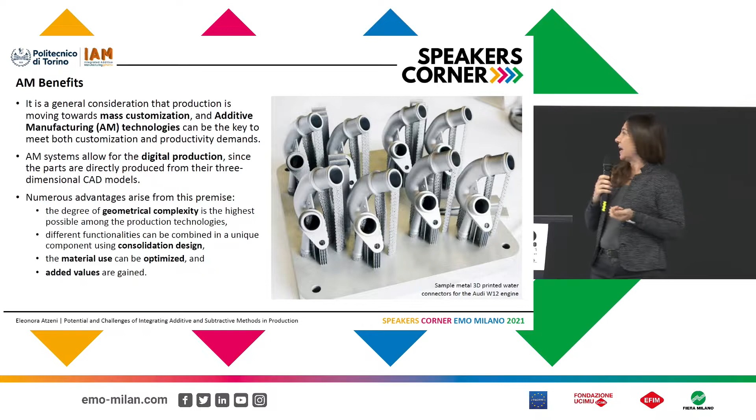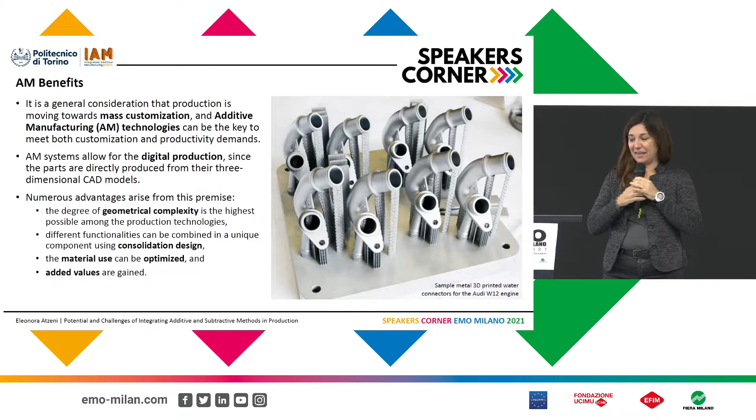Additive manufacturing, as was introduced before, is a flexible technology, is a digital technology. So what you create as a three-dimensional model is produced by the machine. So we have the physical replica of your idea. And this is disruptive, and this meets the mass customization requirements, because you can change the model, you can change the part, you can build different parts on the same job. We can have a customization of components. We can have components with multiple functionalities in the same part, avoiding assembly of different parts. So this is the consolidation, the reduction of number of parts. And we have the added value. This is the most important characteristic of additive manufacturing components.

But there are also some drawbacks. And today we discuss basically the surface quality, because when we want to combine subtractive, it's to remove material to obtain specific properties on the surface.

The part is typically rough. The roughness is higher than conventional machining, especially when we compare it with casting. And the tolerances are larger than other subtractive methods.

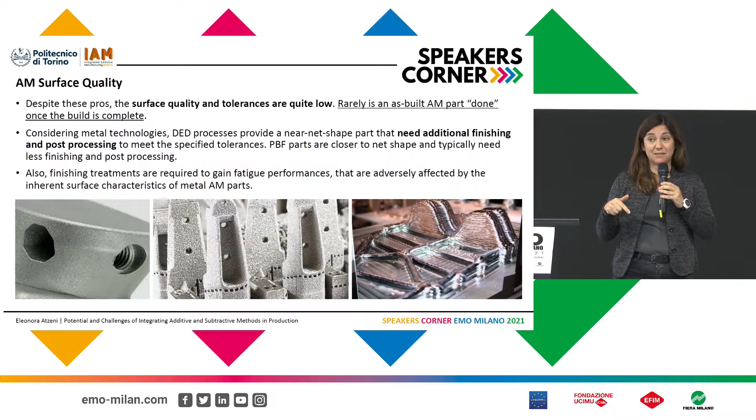So what type of finishing technologies? Basically, the same techniques used in conventional parts can be used in additive manufacturing. Considering metal parts, we can apply media blasting and shot peening to improve the quality of the surface and also obtain a compression state on the surface. That's another characteristic.

Sandblasting basically depends on the system, but it's usually performed manually by the operator. So we have a loss of uniformity on the surface treatment, and it takes a long time.

There are also mass finishing systems, mechanical, using abrasives in a tank, so the part is surrounded by these abrasives. This is faster, but again we have some problems accessing, especially internal surfaces and internal features.

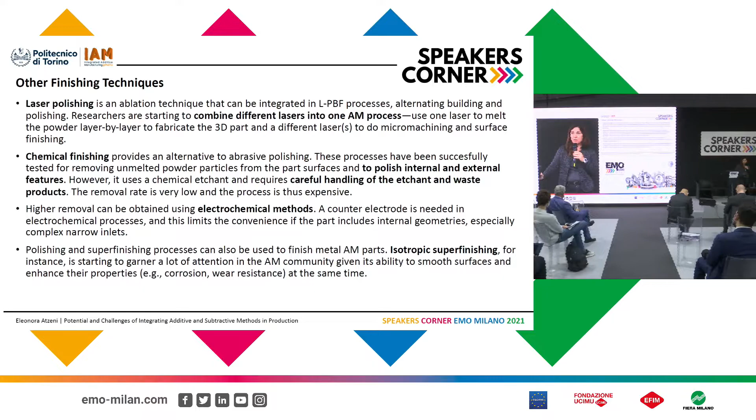Other methods include laser polishing, and this is interesting for laser machines. We have a laser in the machine, and we can combine different lasers, performing building and polishing in the same machine. Some researchers are working on this topic.

Chemical finishing uses an etchant, so we have problems related to safety hazards and the sustainability of the process. Electrochemical finishing, again for internal features, uses an electrode, so there are accessibility problems. Isotropic super finishing for mass production is another interesting system.

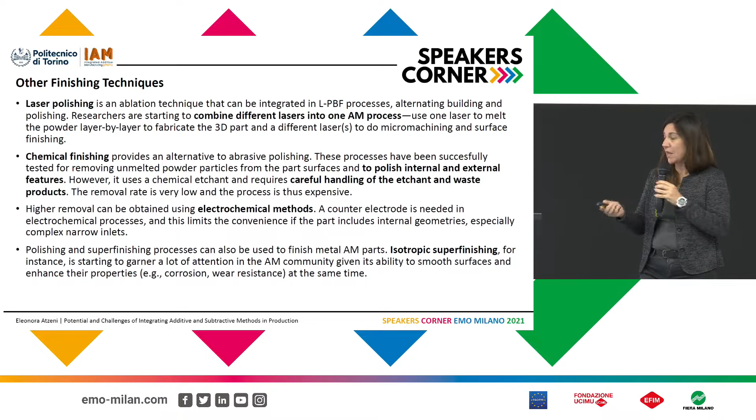By these technologies, we can improve the aesthetic appearance and gain tribological functionality, but if we want precision, to meet close tolerances and the requirements of the design, we need subtractive methods, traditional subtractive machining. In case of machining, we have different solutions. In general, when we talk about hybrid machining, it's the combination of additive and subtractive to obtain this strict part quality.

A possibility is to perform the operations in sequence. First we have production by additive manufacturing, then we move to another machine, a CNC machine, and perform the machining operations. It's better if it's a 5-axis machine, due to the complexity of the geometries.

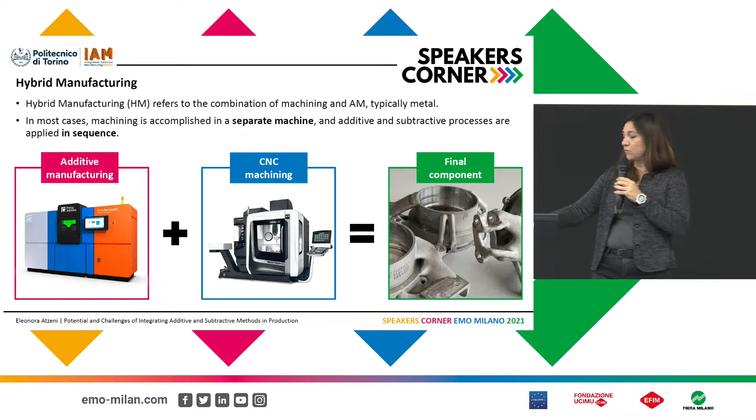But in this case, the same characteristics of additive manufacturing that make this process attractive, the complexity of the part, the optimization, etc., become a problem when machining, because we have to hold and fix the part in the machine, so we need reference surfaces and datum points. The problem is similar to what happens in casting: low stiffness, since we reduce the weight, and the part is optimized for specific loads that are different from the loads applied by machining. Probably we also have difficulty reaching the surface with the tools.

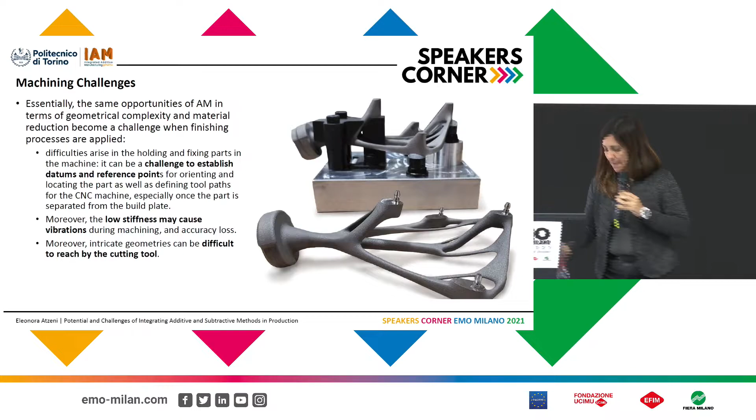So we also have the possibility to alternate. This is a solution: first, the simple geometry is produced by machining, which is cost effective, then we add the additive part.

So we can alternate, but most challenging is the combination of the two processes, additive and machining, in the same system.

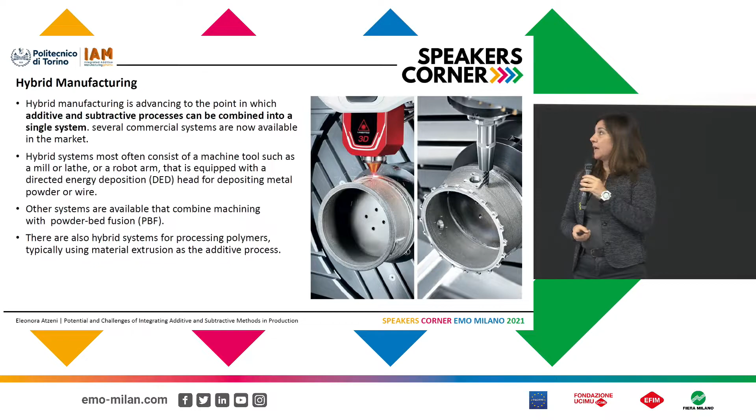There are several commercial systems available, especially based on directed energy deposition. There are some solutions also for powder bed fusion, but it's quite more complex.

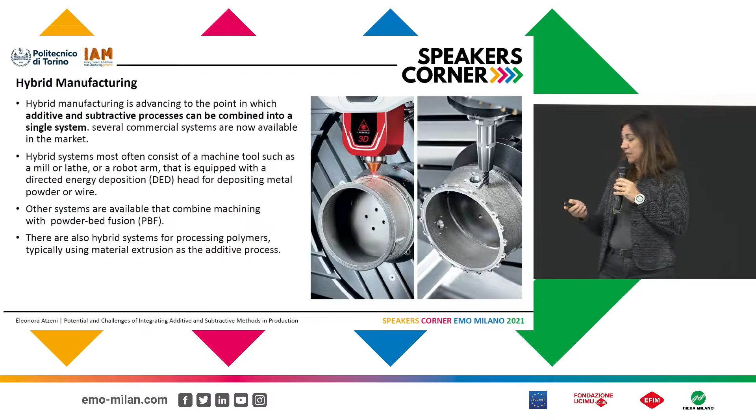With that, we can add features to a substrate, an existing part, and without repositioning, we can machine the same part and perform the surface finish.

In this case, we can combine the advantages, because by additive manufacturing we can add to a substrate, we can repair a component. The repairing application is one of the most interesting applications. We can also change the material, applying multi-graded material possibilities to improve the strength on the surface, or for thermal applications, apply material with higher conductivity only where needed.

So reducing expenses, but also difficult to work with costly materials. By machining in the same system, we avoid repositioning, and we increase the precision of the operations because there are no errors due to changing machines, transferring to another machine, or repositioning the part, so alignment errors.

So internal features are created, machined, and then we add other material. This way we can access internal features that at the end of the process would be inaccessible. So these are all benefits, but there are also many challenges about these processes.

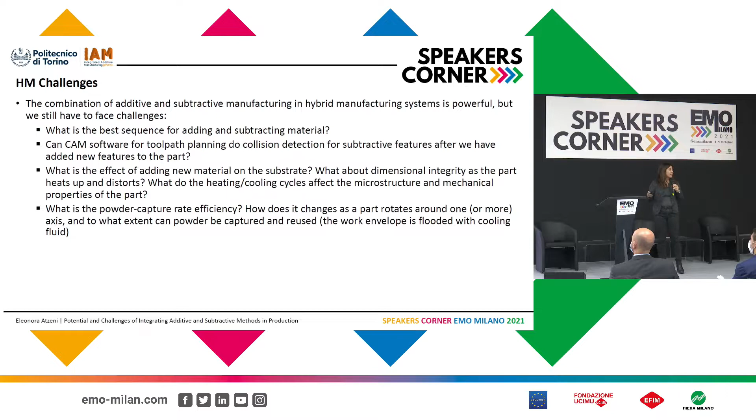What is the best sequence for additive and subtractive? We have to decide. How do we define the toolpath using computer-aided manufacturing software, because when we add material we could have a collision, so the software has to consider this aspect too.

And what is the effect on the substrate? Because there are thermal effects. We add material, we have heating, and it's possible to have deformation or changes in the microstructure. So this aspect should also be considered.

And in the case of deposition or machining, if you use lubricants in machining, we have the problem of reusing the powder. So what is the powder capture rate? This aspect should also be considered.

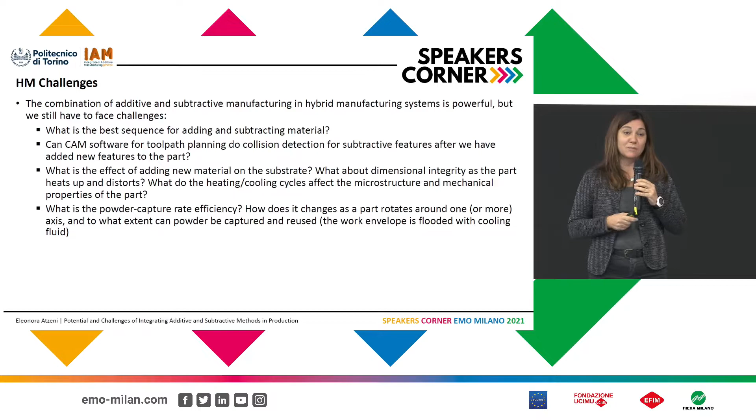So these are challenges that have to be faced in future research to make the process more efficient for industrial production. So I'll conclude with this sentence: very interesting promise, but we have just barely begun to exploit its capabilities. Thank you for your attention.

Thank you very much, and that was perfectly timed, by the way, so thank you for that too.

So we looked at the benefits of additive manufacturing, the benefits of education, and now we need to look at the benefits of developing the technologies and processes in the machines. I would like to introduce Florian Voigt, AM Process Chain, Head of Sales and Application for LASERTEC SLM Technology at DMG Mori. He will discuss challenges in connected processes and unsolved problems in this field.

What I wanted to say is that I think it's very interesting that Mr. Voigt has expertise specifically in SLM, mainly in the SLM processes. And as we saw, hybrid technology started with DED, but now we're seeing how powder bed fusion SLM type processes can also benefit from hybridization.

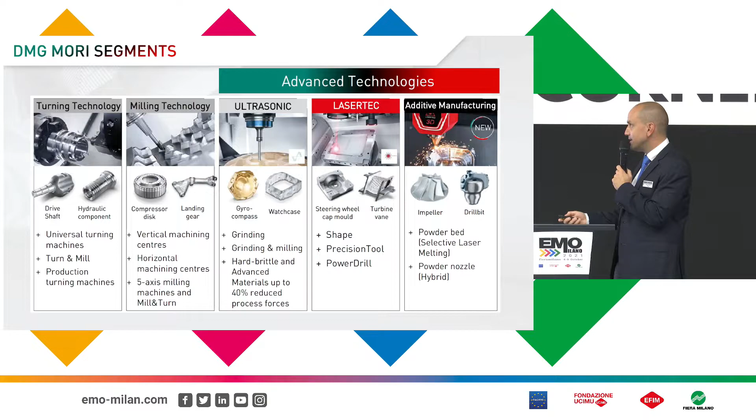I don't think I have to talk too much about DMG Mori, you're all well aware we're number one in the world when it comes to machine tools, with different locations all over the place. In addition, we have not only machine tools, advanced technologies is one of the nice parts of DMG Mori, because we benefit from all the know-how within the group when it comes to CNC machining. You nicely explained the problems with clamping and the forces during the CNC process, and this is an extreme benefit and one of our core businesses.

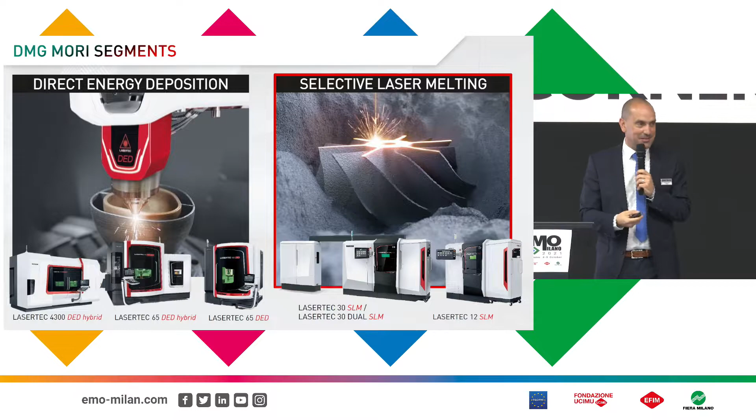Some of these pictures you have already seen, so again not well aligned, but in the end we talk about the same topic, so you will see some pictures in some of our speeches. These are the parts you well know: nice, shiny, fancy, with a lot of beneficial features integrated, and this is what you expect.

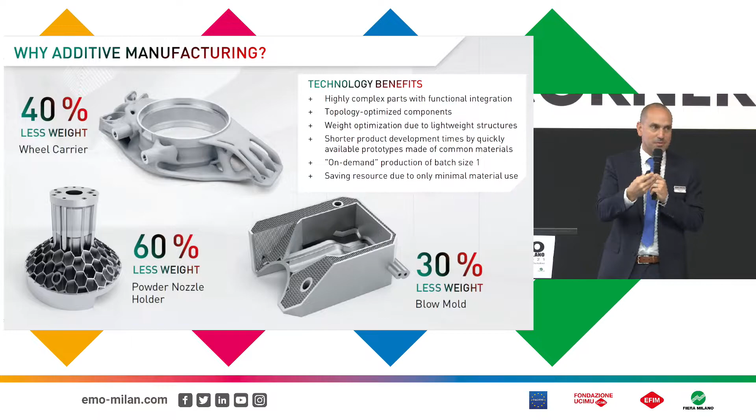To a certain extent, it's also our fault that we always show these nice, shiny, sometimes finished machine parts at exhibitions. This is the expectation of most of our customers, so when I talk to prospects and customers, they have this in mind.

I want to give you a small insight, just a small story. Our management changed, and we now have a new managing director with a strong background in CNC machining. We got a requirement from a potential customer to print a nice wheel carrier, as you can see over there, and the question was: can we build this part within the specs?

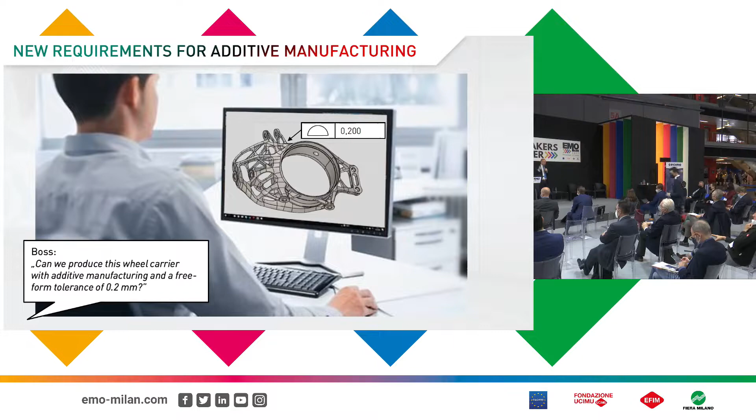You might see this small sign up there. We all stood up there, all the speakers, and I asked who is aware of what this sign means. I want to place the same question here: do you know what the sign means? Has someone an idea? For sure, a metrology expert from Renishaw could answer the question, but we had to look it up. It's free-form tolerance, meaning the entire part, including the not-machined areas, must be within this tolerance.

The question was quite easy—you can expect the same from your boss: can we produce this part within the specs? Our application engineer, a really educated guy with a lot of experience, was unable to answer this question up front. No chance to answer it. This was quite funny—it took us over two months in the end to answer this question.

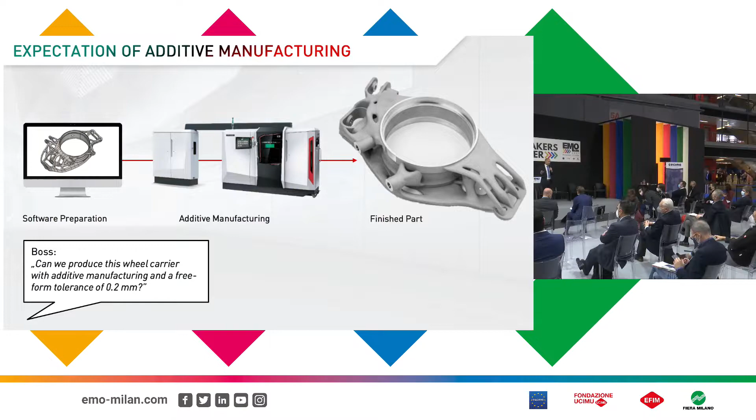I just want to give you a small insight about this internal discussion. Most people think, as I said, you just print it and get your part right away—no headaches, no problems, nothing post-processing wise. But that's, sorry to say, not true. You have to think about how you get to your finished part.

Again, people tell me all the time I just showed the ugliest, nastiest parts at the exhibitions, and that's not to mess around with additive manufacturing. Don't get me wrong, as I said, it's an insane technology.

But this is what you get out of a 3D printer, especially with metal. You have your part there, welded down with support structure to your base plate. This is what you get—ugly surfaces, nothing nice. Especially my colleagues who come from CNC machining always say it's so insanely nasty, so ugly, no one wants to touch this part. For sure, the benefits drive this technology—integration, lightweight, and all the stuff you heard about up front—but then you end up with a part like this, and the problem starts.

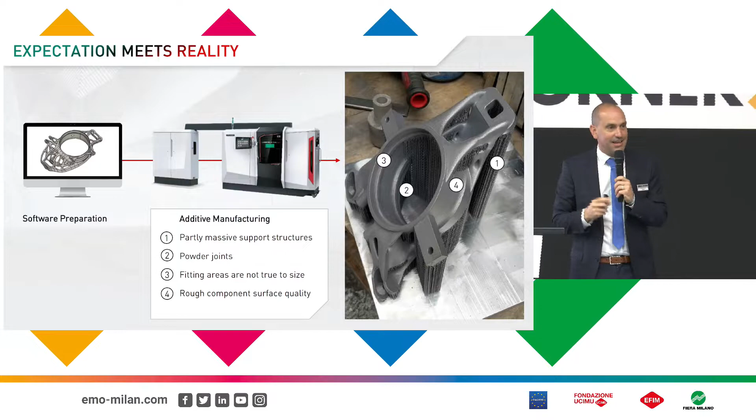Hybrid solutions, as I told you, is in our DNA, but the problem is how to set it up. Hybrid in our mindset doesn't mean it has to be in one machine. The process chain has a lot of different opportunities to set up, especially the one where we start with a machined part, where it doesn't have to be that complex, and we add material additively where it has a benefit. This is, from our perspective, maybe the most beneficial process chain in the end.

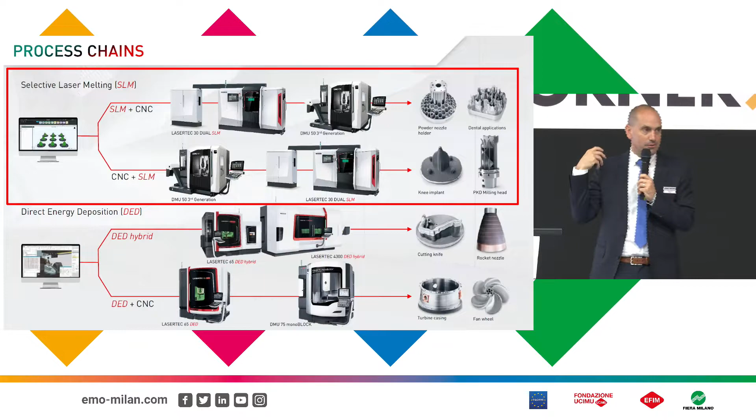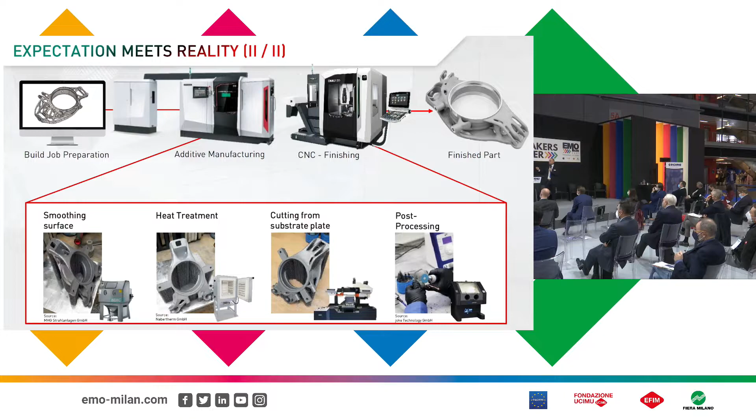But again, we set up the process chain with another 3D printer up front for additive, but in the end it's the same thing. This is what you have to keep in mind: surface smoothing, heat treatment, how to cut it from the base plate, how to post-process areas where you have no access with a machine tool, and then how to clamp and machine it on your CNC machine.

Expectations meet reality, and this is also what happened internally at DMG Mori Additive. We set up this process chain, but in the end we forgot about distortion—it's a welding process. We are heroes in generating chips; you don't have to ask DMG Mori how to generate a chip, but how to weld something is a totally different approach. For sure, as DMG Mori Additive, we have some ideas and some background knowledge.

In the end, it came down to the problem of how to optimize the part for additive manufacturing, do some analysis if this part is still meeting the specs, design additional features as shown up front, and figure out how to clamp this part. There's no chance to just print it as is and then try to fix it in a machine. You have to add material in addition.

And then we did a simulation. You start with your CAD model, no distortion, nothing at all, and then you simulate it. In the end, you see the part is completely gone. You won't even find it in a CNC machine by touch probing it. It was really a nightmare.

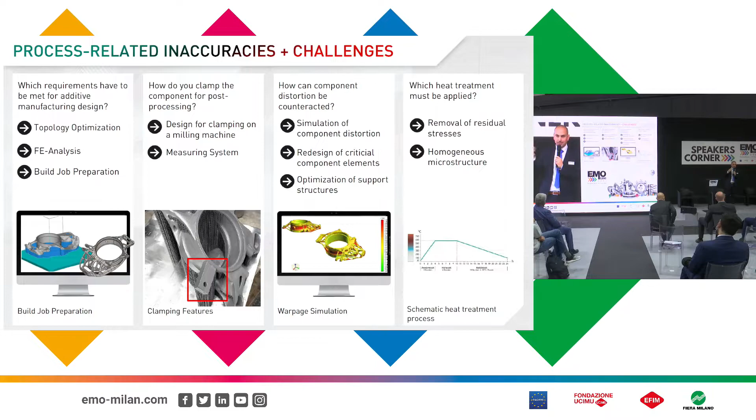So we had to do several calculations, pre-deform it, and in the end also support it differently after the pre-deformation. Set it up again, do the calculation back and forth. Within these several loops, we ended up within the specs, being in this freeform tolerance of 0.2 millimeters.

But in the end, how do you freeze this geometry afterwards? If you just detach it after printing, it's already distorted again. So you have to make up your mind about heat treatment, and heat treatment processes also maybe specified to the needs of the part and the material.

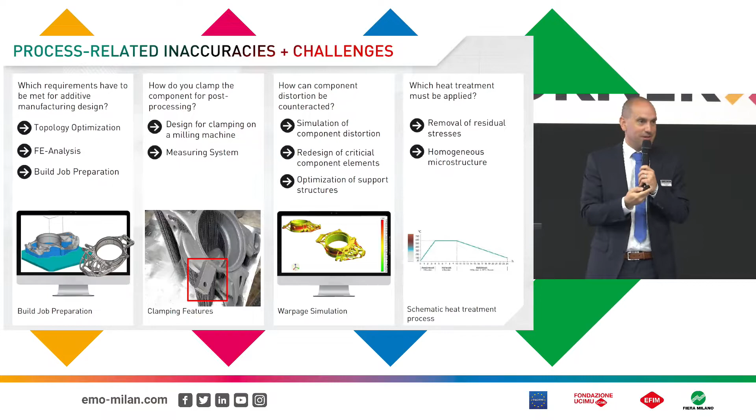So again, remember the question: can we produce the part within the specs? I don't know what kind of people you have in your company, but this is in the end something you have to have a genius for. This is the part we expect. Nicely done, perfectly.

You need this genius guy with know-how about build job preparation, all the process simulations, microstructure analysis maybe in addition as a material scientist, then he should know how to operate our 3D printer and also how to machine the part in the end. Just try to ask this one question to one person in your company - you will need an expert group in the end to answer it.

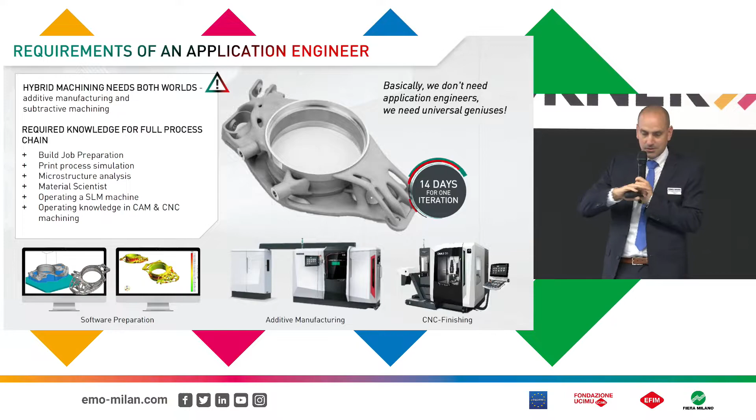So in the end, it took us 14 days. Everyone is thinking, okay, 3D printing is so fast, rapid prototyping and all this stuff. But if you really want a part which is not a bottle opener or a pencil, something that can actually be used in industry, you have to make up your mind and set up all these processes, and also, if possible, a seamless software platform for it.

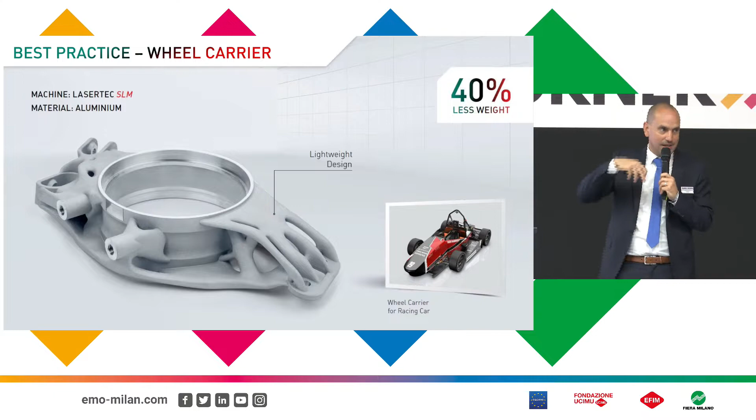So in the end, as I said, the part is done. A lot of things had to be removed also manually. So some kind of artists, well known when it comes to dental applications - there you have this kind of skills available. So in the end, you will always have a challenge to reach all the features and machine it. But we succeeded, and you can see the nice finished areas and also where we just removed the additional material for clamping.

I want to show you another approach which we had internally. This was an internal task of our colleagues from Gildemeister Drehmaschinen GmbH. So we set up our robot to go ahead, and this is the approach which should take place in your companies as well: think in functions and not in restrictions.

So these guys set up this nice topology optimization up front where we had to have material and all these channels and all this stuff. For sure, we had to cover it to get rid of all these chips so they wouldn't end up there. And we made it a little bit stiffer.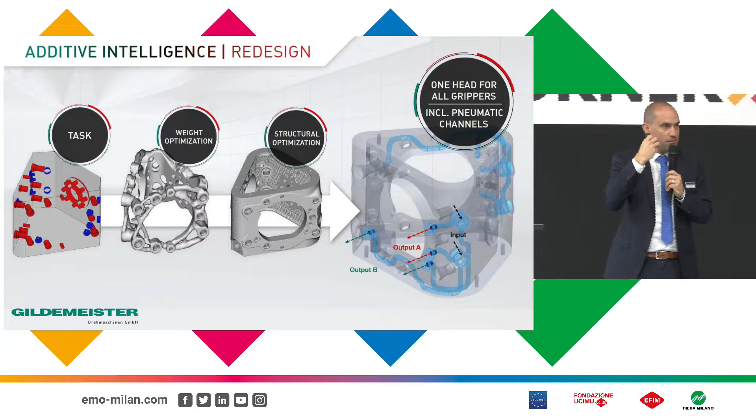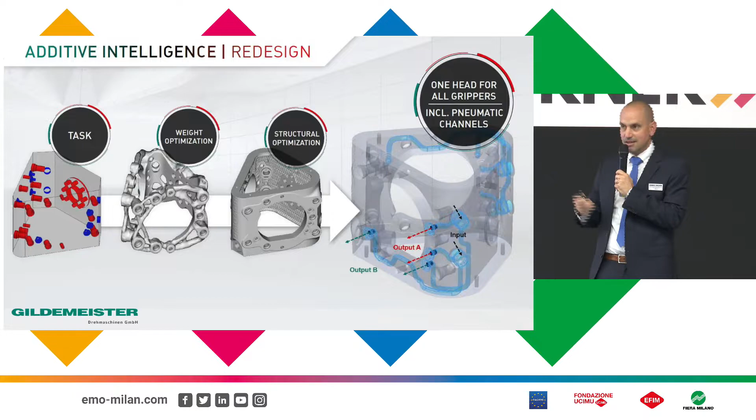So this was an eye-opener for our colleagues in the machine tool industry. We all think about race cars, aerospace, and all this stuff, but there are so many applications out there in general engineering which have a need for additive manufacturing. If you set up your process chain the right way and think in functions, not in restrictions, you will end up with these kinds of nice parts, as you can see over here.

For sure, in the end, if you ask DMG Mori, it always comes down to the question of how to do it - how to set it up.

So we printed 4 of them on a normal base plate, and then we tried to separate them somehow and bring it to a machine tool. For sure, this can work if you have easy geometries, but we are not DMG Mori if we don't have an answer to this also. So we integrated a 0-point clamping system in our 3D printer, and that's the way how to bring parts back and forth between the technologies to end up really in a hybrid process chain.

And again, a funny story about this. You see the parts here not positioned in the middle of this 0-point clamping area. A CNC specialist directly knows why. So again, we set it up in the middle, handed it over to our experts in CNC machining, and he was asking if we are really working in the same company.

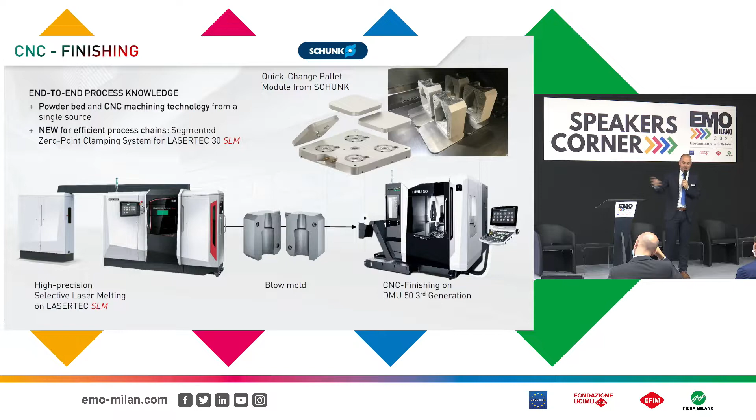I was not aware, but for sure, the kinematics of the CNC machine also has an influence on how to position the part. If we place it like you can see here on one edge, it's way easier to access the areas without generating crashes or interference between the machine tool and the part itself. So again, a lesson learned on our end: keep a CNC guy close to your additive expert in order to make sure that you end up with a part which can also be machined on a CNC machine.

With this 0-point clamping system, I think we have one of the key questions answered: how to bring it back and forth without a lot of tolerance issues or problems finding the parts. But again, this was also a lesson learned.

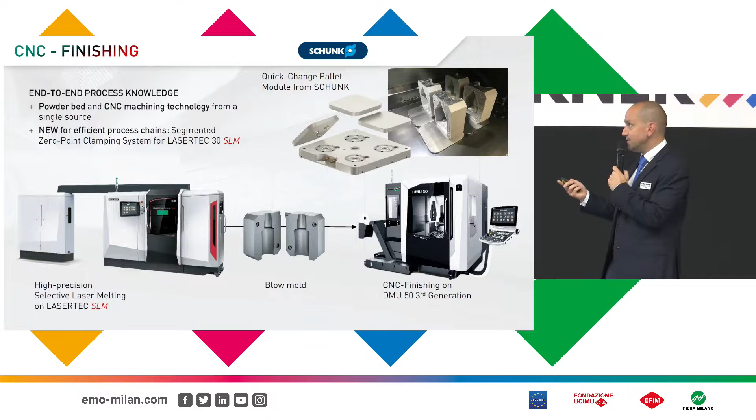One example in the end, this is from the medical industry. Setting up a part, this one in titanium, in the way that you just machine up front where you need the nice surfaces, tolerances and all this stuff, place it afterwards in the machine and add material where it's needed. In this way, we could avoid all these nasty support structures and showed additional benefits.

Because normally you weld the same material of your part to your base plate. So a titanium part needs to be welded on a titanium base plate. And after that, you have to saw it away somehow, but you also have to machine the base plate. So it's a wear part.

With this setup, we could do this base plate in stainless steel. And because the part itself is the base where we weld on top, there is no wear at the base plate. So thinking in process chains means taking care of a lot of different aspects.

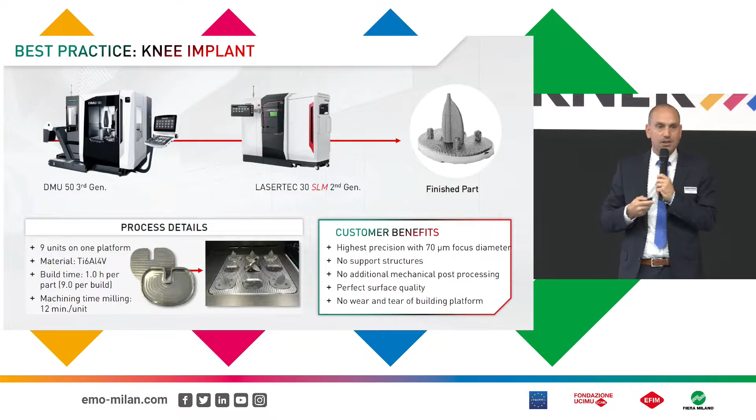And we have specialists within the group. We have seen this over several projects. Therefore, we set up a special team within DMG Mori called DMG Mori Additive Intelligence, and these guys will help you all the way down. If you face issues, as I explained in my speech, don't hesitate to come to us and ask, and we would try to set up the most beneficial process chain for you, no matter if it's SLM or DED in the end. We will find the right solution for your future production and the nice parts which we all expect in the near future.

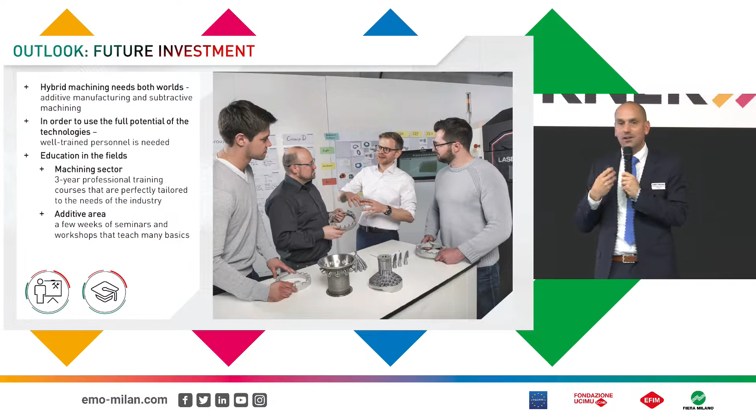So thanks for the chance to talk to you here, and I'm more than happy to answer your questions afterwards in our panel discussion. Thanks.

Thank you very much for that, that was very, very interesting. I will ask you later if, after that long process of understanding of the first example you made, the next time it goes faster or not, but I will ask you in the panel.

So let's look a little more about the additive part of the hybrid technology equation. I'd like to call Paolo Calefati, Head of Additive Manufacturing and Innovation at Prima Industrie, for a presentation on mechatronics and photonics as key technologies for the development of laser machines for AM of metal components. Paolo, you have the mic.

Okay, thank you for the invitation. Thank you to CECIMO for this opportunity and to everybody for being here. My name is Paolo Calefati, I'm the head of the Prima Additive Division, a new division of the Prima Industrie group. Probably nobody knows Prima Industrie very well for additive manufacturing, so I prepared this presentation just to briefly introduce the reality of Prima Additive. And yes, talking about hybrid technology, I totally agree with what Florian said before about that. We are very conscious about the limitations of additive.

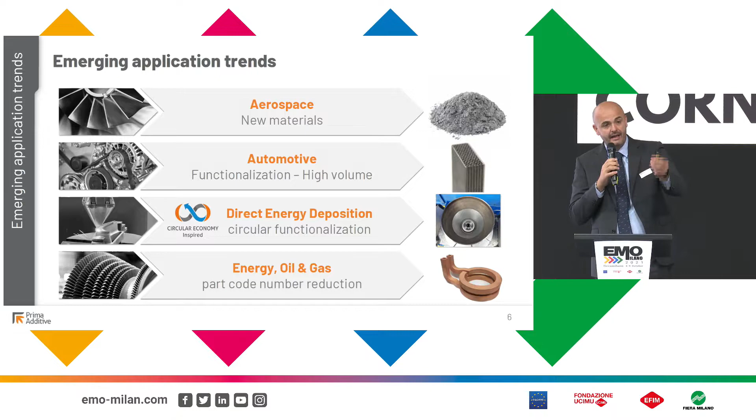But there is, in my opinion, something that should be done for additive technologies regarding the problem that Florian showed before, because it is not easy. So our focus is improving the additive manufacturing machine maturation - introducing new laser sources, new features for the machine that could improve the additive manufacturing process. It could solve certain problems like deformation, material properties, and so on.

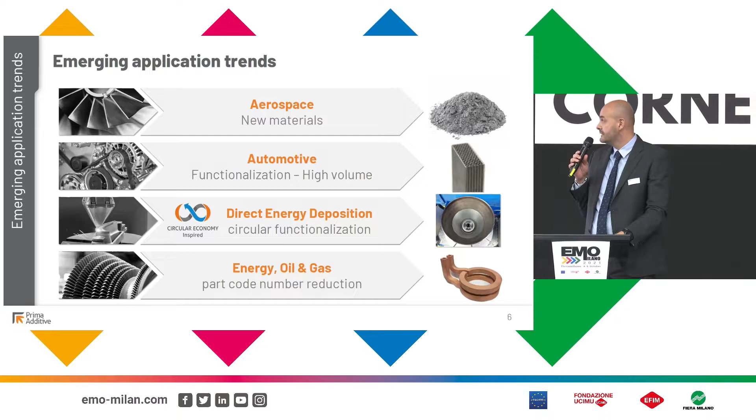So just talking about 4 sectors, we've gotten experience in these 4 sectors in our 2 years of activity in additive: new materials development, aerospace, automotive talking about functionalization and high volume application, direct energy deposition as a technology we know very well, and then an application about circular, and some application for oil and gas.

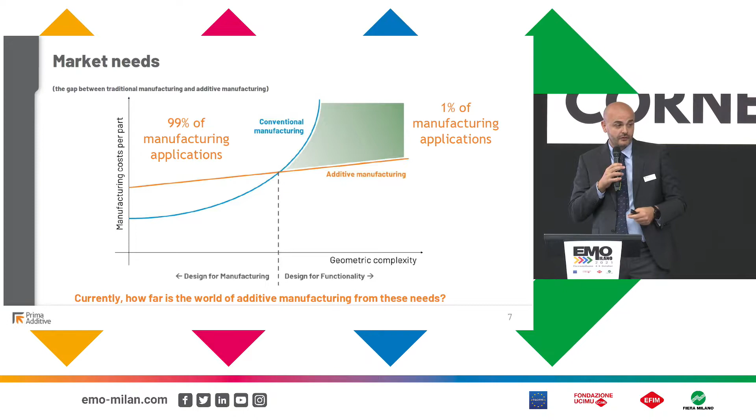It means there is a break-even between geometries, functionalization, cost, and volumes, and so on. Sometimes hybrid technology is born about this case - let's match additive technologies and milling, and all of us have the temptation to say, okay, a bit of milling, and then I can have the same components with decreased cost. It's fine, it's a way to do that, but the point is we have to improve the state of the art of the additive machine. This is our approach, and this is our added value in this market, to be honest.

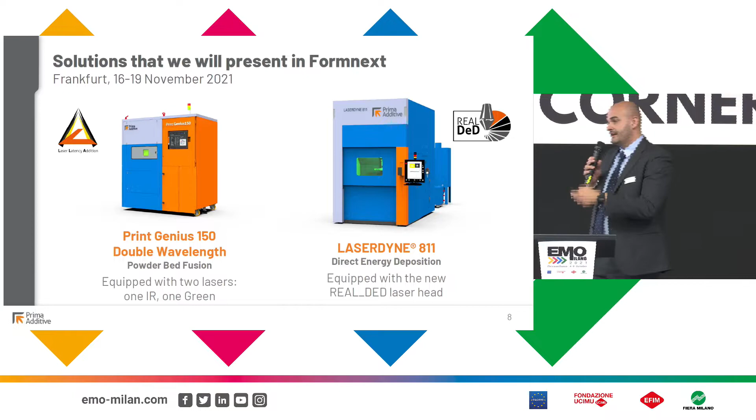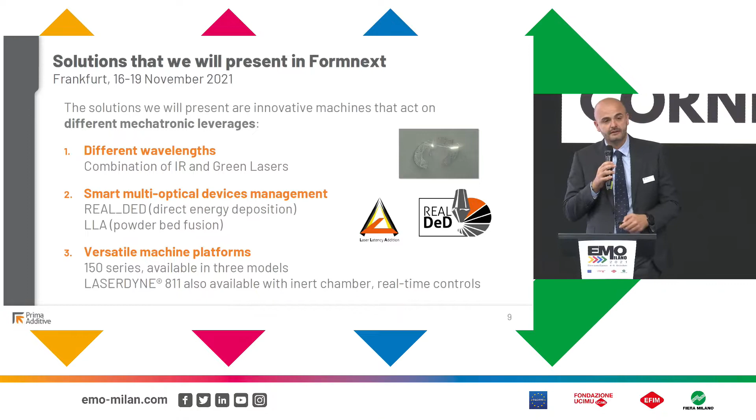So, these are our 2 new technologies that we are going to introduce at the next Formnext. We introduced new laser sources, different wavelengths, also to work different materials, but also to improve material properties. We also improved the state of the art of the optical devices in order to have a stress relief approach during the process, to have a different wavelength in order to use the right laser source for that kind of material. And we also developed a machine platform that is very flexible to use.

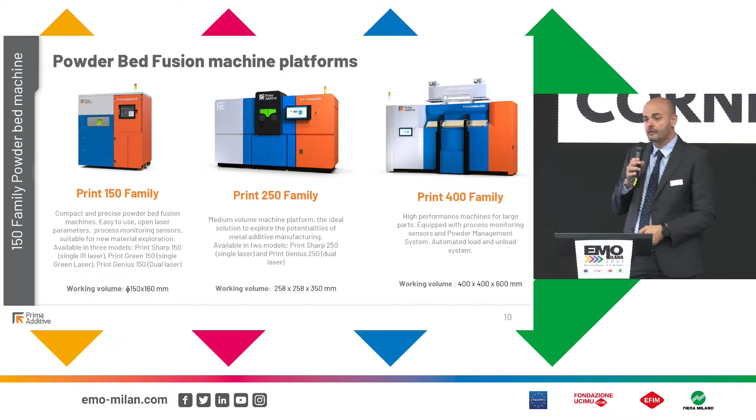Okay, this is our powder bed fusion family. We have 3 platforms: 150, 250, and 400. You can visit us - you can see 2 of our platforms in this exhibition. We are going to introduce this machine that is very flexible. We are mixing - in this sense we are also hybrid - because we are mixing infrared laser and green laser, and we can select the proper laser to work different materials. We have a different monitoring system, and we also improved the capability of connecting this machine with the rest of the factory through the 5G interface and real-time control of the machine.

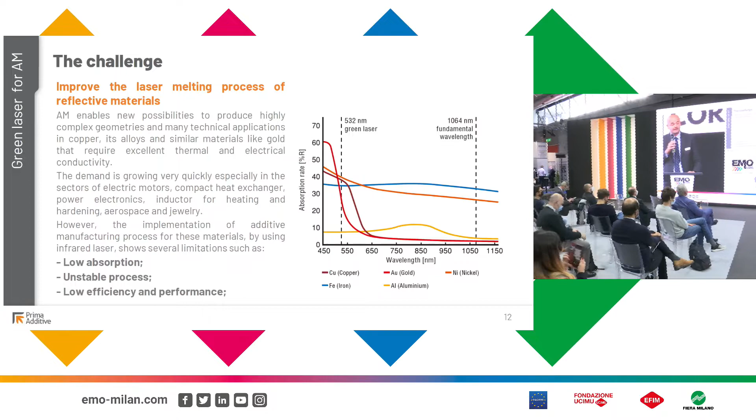Why green laser? You can see here that for copper, for instance, green laser is a very good point because we have better absorption, a stable process, and the material properties are quite improved.

Here you can see some aerospace applications, but also oil and gas. We can reduce the process to reach this kind of tools, but we are also decreasing the cost. We are improving the geometries of the part, and the roughness is much better in this case. But these applications focus on small volumes, high cost. They are quite okay for additive at this moment. The green laser allows us to work with pure copper and to reach probably the material property as a bulk.

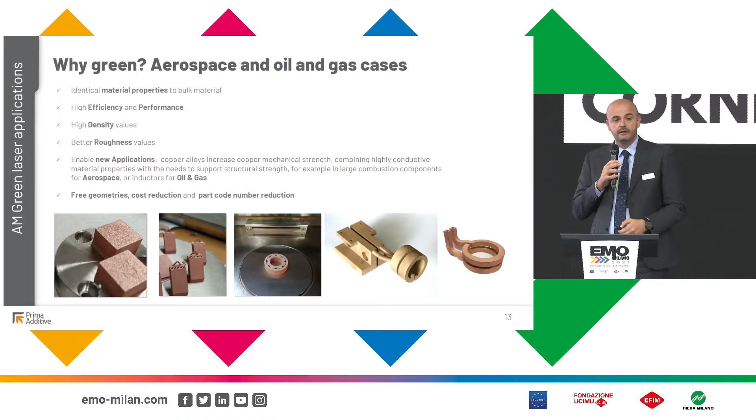Here we are also going to develop multi-optics. Our next development for next year is to introduce up to 16 lasers for machines.

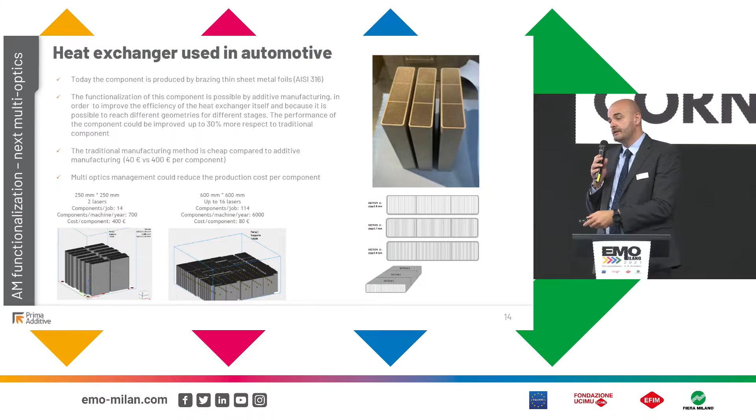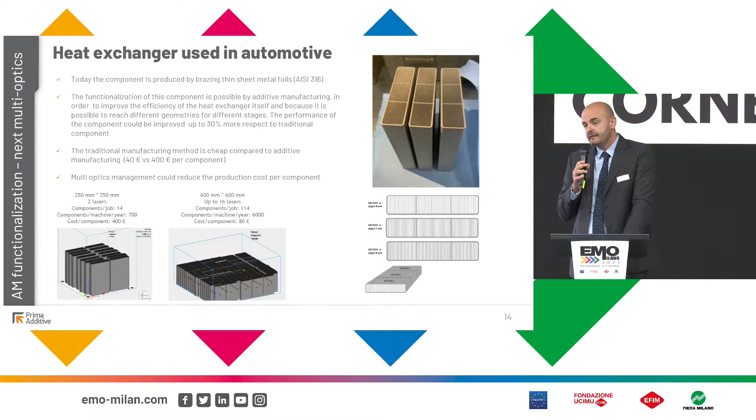Today, the decided cost for automotive is 40 euro per component, but with the dual laser, we can produce it for 400 euro. So it's very expensive. Improving the number of lasers up to 16 with the 600 by 600 platform that we are going to have in the next 2 years, the idea is to reduce the cost down to 80 euro per component. It is higher than 40 euro, but it is accepted because the component is functionalized.

Then talking about direct energy deposition, our technology usually meshed with milling, we are going to introduce our Real DED. Real is an acronym - it means real-time adjustment of the beam during the direct energy deposition. We have very high dynamic beam shaping, so we can adapt the beam size of the laser in real time. We can be very precise or very productive.

But the point is that during this process with beam shaping, we are also going to improve the material properties because we are making some stress relief during the process.

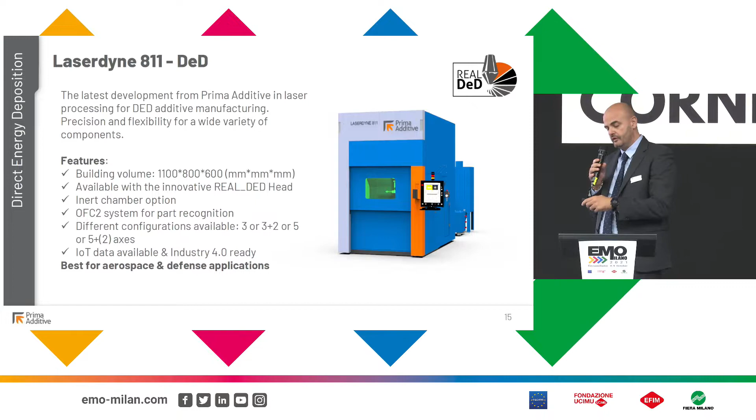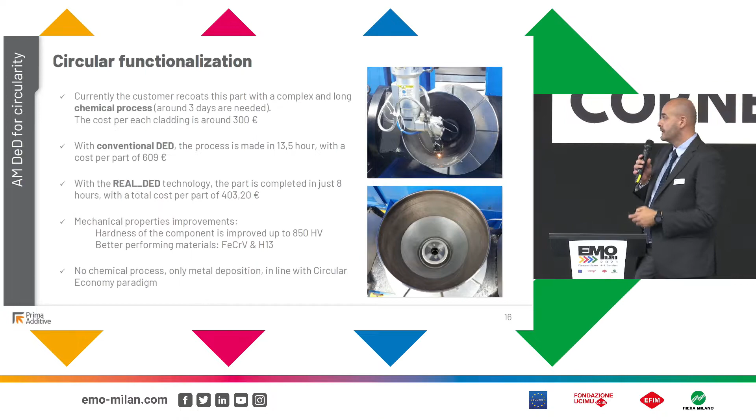So the most important part is let's work on the integration of the machine with the milling machine and other processing - let's work on the integration of additive in the traditional industrial context. But the most important part is that we should keep working on improvement aspects of the additive manufacturing machine, because we have to solve the problem that Florian showed before. This is the point.

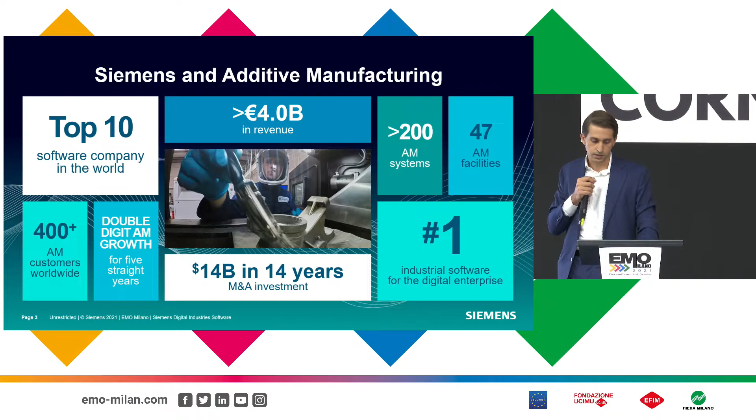Our understanding right now is that one of the main barriers to industrializing additive manufacturing, when it comes to software, is an interrupted, fragmented workflow. What I mean is that most of the companies we talk to are using multiple vertical software solutions, and these software solutions are not talking together. This means that for industries such as aerospace or medical, it's incredibly hard to trace the process and certify it, because there's no guarantee, no way to manage data transfer every time you go from one software to the following one.

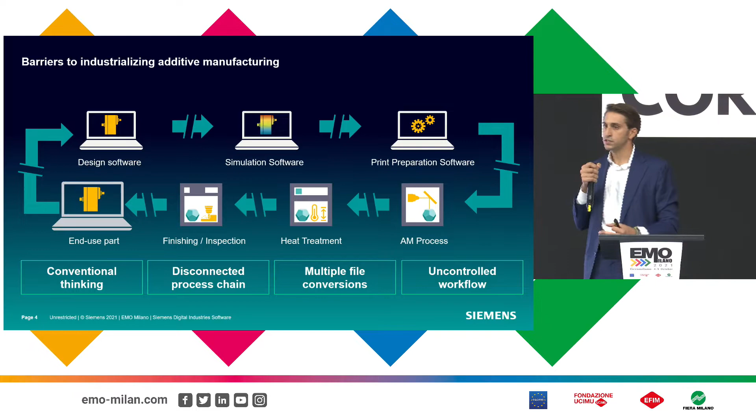And for all those companies in sectors where certification is not key, like automotive, in any case such a process is incredibly inefficient. It simply takes so much time to go from designing your component to printing it, only because you keep losing data and your data chain is disrupted.

This is why, as Siemens, we try to solve this issue, allowing you to leverage what we call a holistic software solution. When I say so, I mean that we provide just one software environment in which you will be able to find all the tools you need to go through the entire additive workflow.

You will be able to design your component, to optimize it. You will be able to simulate the performance of your component in such a way that it will be optimally designed. You will also be able to manufacture your component, whether it is hybrid or other sorts of technologies, and you will have the chance to simulate your process from a thermal perspective. Finally, you'll have the chance to directly integrate with machines and manage all the quality issues.

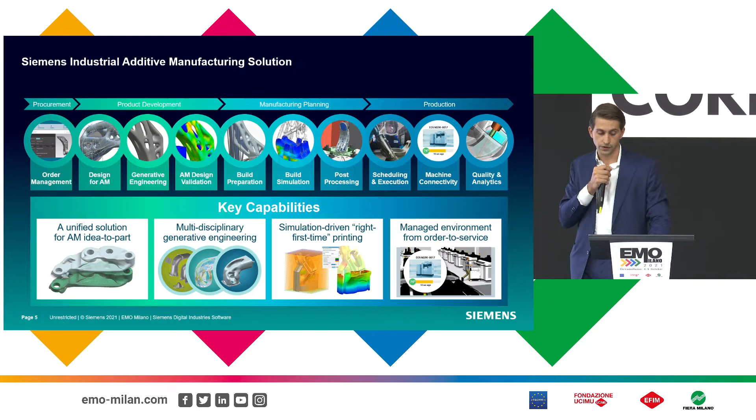For companies and sectors like aerospace and medical, this is key to being able to easily certify this sort of process. So I've called it holistic. When I say so, I also mean that we cover the main technologies, whether it's planar technologies such as powder bed or binder jetting, as well as multi-axis technologies, which is going to be our focus today.

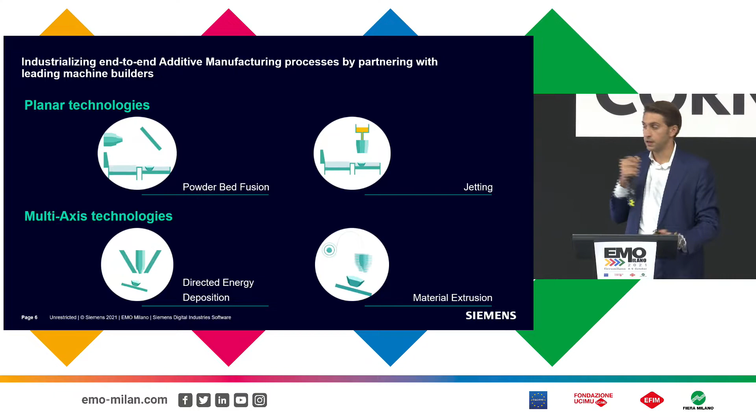But of course, we cannot do that all alone. Our strategy is to partner with the best machine tool builders in the market. So if anyone in the audience is working for an OEM, please get in touch with us. We are sure that we could have a very interesting business conversation on how we could benefit from each other.

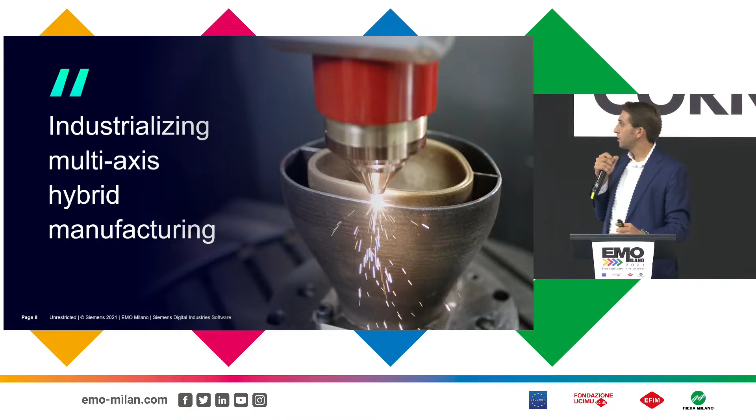But okay, let's deep dive into what our solution is actually capable of. You may have noticed that I haven't mentioned a specific additive technology so far. This is mainly because we provide support for all the main technologies when it comes to hybrid technology and deposition technology, whether we're talking about directed energy deposition, wire arc, or big plastic industrial machines which are depositing material.

So I said we have this very nice workflow, and what is exactly relevant for multi-axis deposition technology? Well, at first you want to design your hybrid part. Then probably you will want to understand whether this part is exactly manufacturable. And then after that, you can engineer all the manufacturing

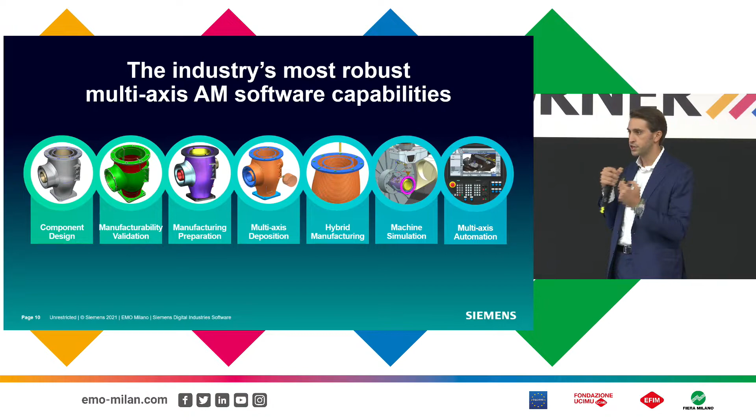strategies, whether it is hybrid or it is just purely additive. And after that, you want to simulate your machine, whether we are talking about a kinematic simulation of your machine, try and understand whether there are some issues related to out of reach or collision, but also the thermal process, the additive thermal process. And this is key in this case. Try and understand upfront if there will be any issue for your production. Finally, of course, you can integrate with your machines and you can get your part.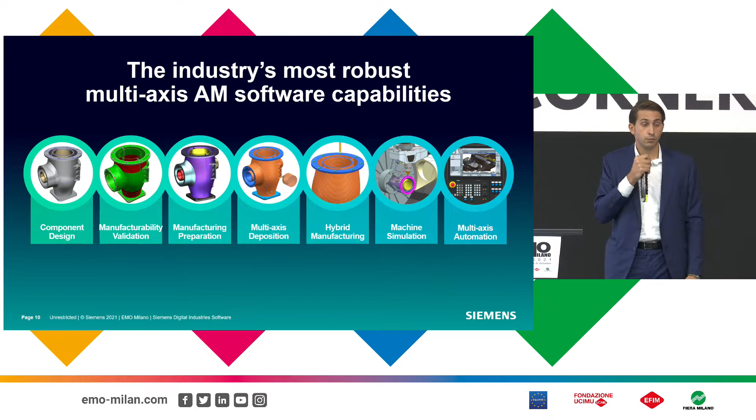So I'll try to talk a little bit about these topics process-wise. And the first topic is, of course, component design. So we provide one of the best-in-class CAD tools, Siemens NX. You can design your component, optimize it with the most advanced technology right now, which are available on the market. We call it generative engineering or other sorts of optimization.

What I want to stress here is how important and relevant having just one software solution between your design department and your manufacturing department. And here I want to ask you a question. How many times did you have to redesign your components because there were some sort of issues downstream? How much time maybe for manufacturing, and how much time did you lose because you had to recreate all the manufacturing strategies simply because there was some issue from a design standpoint?

Well, with our solution, this will be solved because all of the features would be easily updatable with a push of a button. And yeah, this is a great value for this kind of industries.

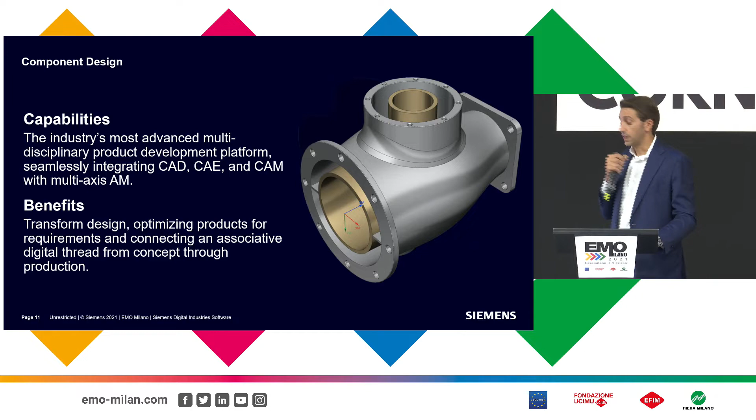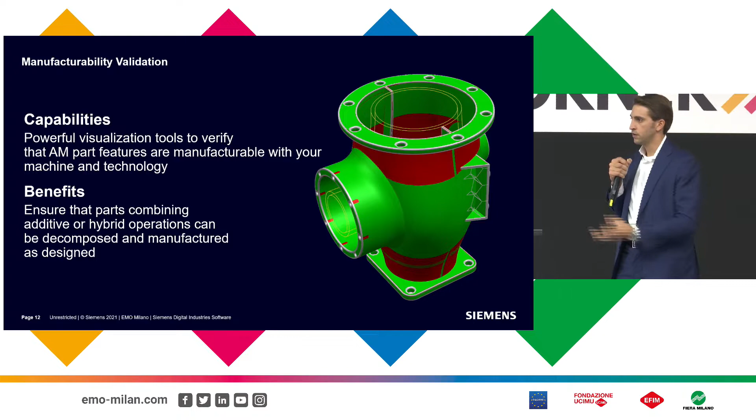But okay, let's deep dive in the following topic, that is whether you design and manufacture your components, or you receive the geometries from your clients. At a certain point, you have to ask yourself, but am I able to create this component with the technology I have in my shop floor?

Well, we can help you to understand that. We offer a series of tools for manufacturability validation, so you can understand whether your component is thick enough, or it fits in your machine, or it has the correct overhang angles, and you can do that easily. And as you can see in the photo, you can create it, and you can color your components where you have some issues.

The next topic and the next step when you have to develop your component, it's usually trying to prepare it for manufacturing. We call it decomposition phase. So we are trying to split our object in different features, which can then be deposited. And you can do that simply in our software with the powerful and flexible CAD tools you already have available.

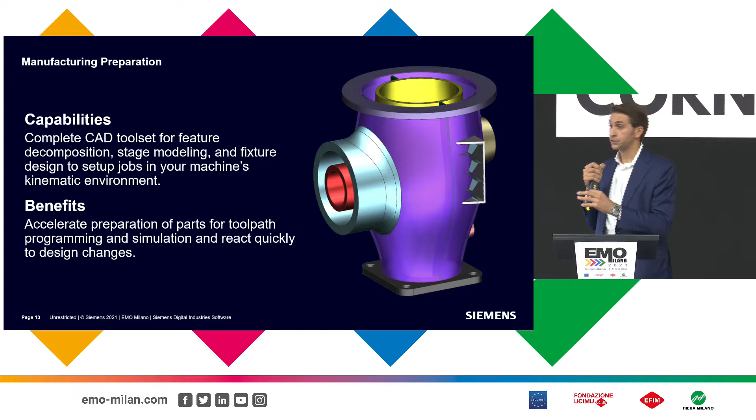And this is usually also a good moment for fixing all those issues related to manufacturing. You can add material here and there, or you can tweak the draft angle so that you won't have any surface quality issues. Well, the next step, finally, we talk about deposition.

So in our solution, you can leverage the best of our 3-axis and 5-axis operation. And here I would like to stress a little bit the importance of 5-axis operation in depositing, whether we are talking about direct energy deposition or plastic deposition, and again, wire arc. So 5-axis operations are not there only for allowing you to create a very complex shape, such as heat exchanger vanes or turbine blades, but they are really the key to get a very nice superficial finishing.

So this is key in this sort of technology, especially when it comes to finishing these components. Basically, you are able to create more constant thickness walls in your components, and when it comes to finishing, you simply have to remove less material. It will take less time, and again, you'll consume less tooling. So it's simply key to drive down the cost.

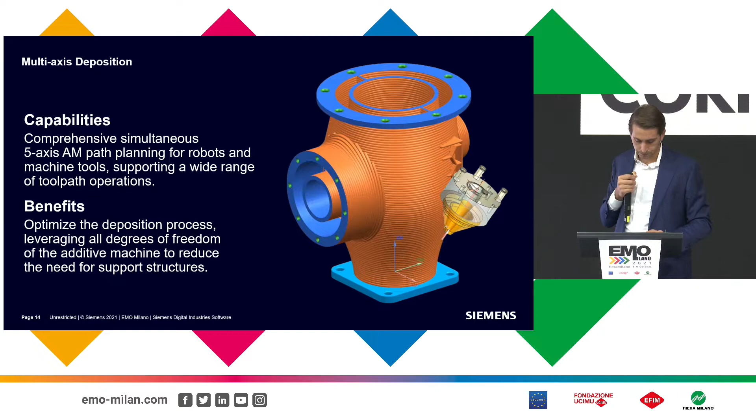But you may wonder, what sort of operation can we do? What sort of geometry can we create? Well, we provide a great deal of flexibility in our solution. So whether you have to deposit a very simple shape, you can deposit that with slices that are parallel to each other, it doesn't really matter if they are parallel to your build plane or at angles. Well, gravity does matter, but from a software standpoint, of course, you have this sort of flexibility.

You can deposit material on a cylinder or some revolute shape. You could come up basically with an additive lathe, but you can also deposit material on a very complicated 3D shape with our additive freeform operation.

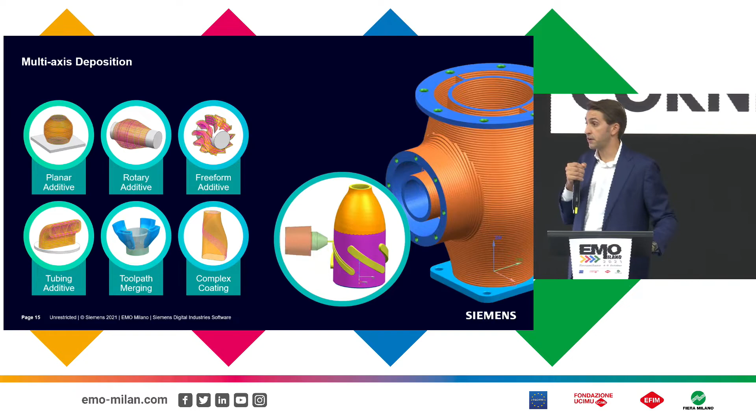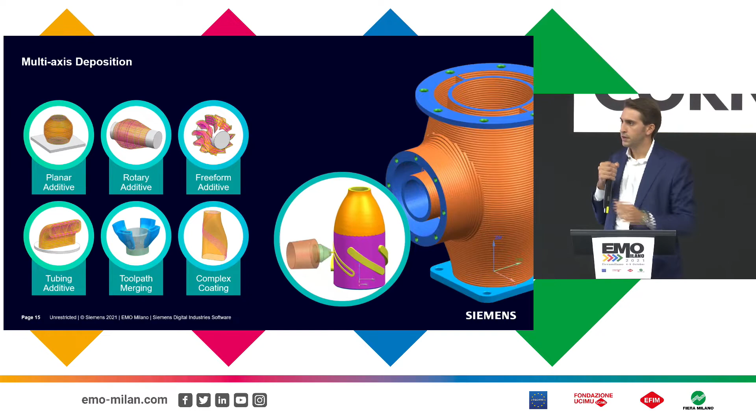Finally, we provide great support for all those coating operations which are so needed when it comes to repairing, as well as when you have to coat a certain surface with continuous fiber. So this is really helpful in this case.

Well, finally, we start to talk about hybrid. In our software, hybrid means that in the same environment, in the same software, in the same file, in the same graphic window, you will be able to start to subtract material and to introduce subtractive operations. This gives you a great deal of flexibility simply because you have a huge amount of possibility in terms of manufacturing strategies.

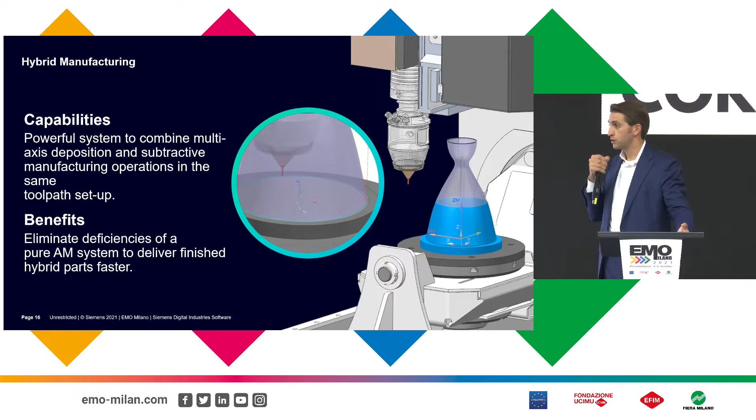So you could go from a deposit-mill-deposit approach in which you deposit a bit of material and then finish that. This is great because basically you can forget about undercuts, because undercuts are not going to be there when you mill your components since they haven't been deposited yet.

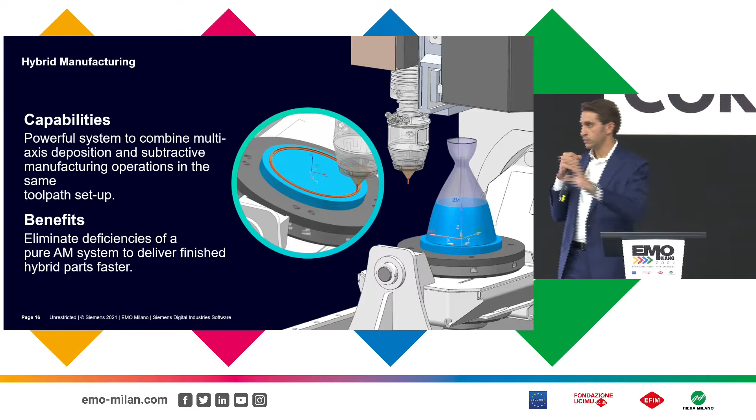Or you can go, and this is usually very helpful, if you have a hybrid machine with both deposition and milling functionalities. But you can also, if you have multiple machines, go for a full deposition program, and then go directly to finish your components.

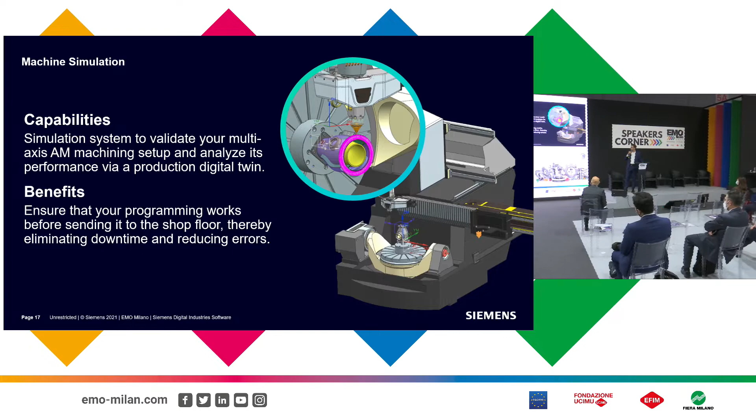Well, now we talk about simulation. When you have defined all your strategy, you will wonder, can I do this? Does my part program have any issues?

We not only provide the capability to simulate the kinematics of your machine so that you can understand whether there are collisions, out-of-reach conditions if we're talking about a robotic solution, or singularities. We also provide you the ability to simulate the additive process itself.

We have to remember that after all, the additive process is a hot process. There are a lot of issues that could happen while you're printing—there could be detachment from the build plate, warping, or wall collapse. This is something you would like to know upfront, so that you can move toward a zero scrap rate.

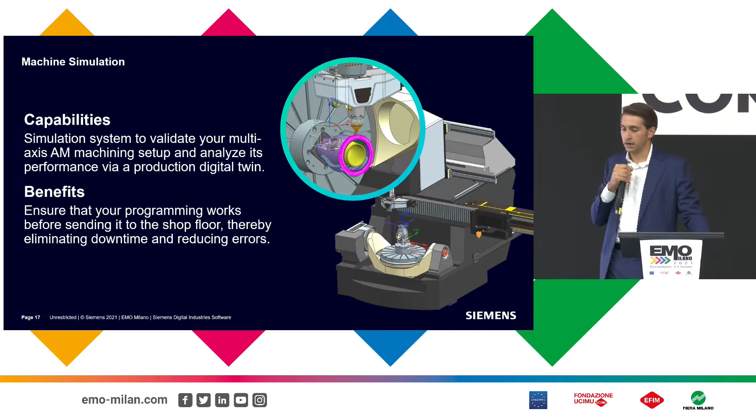Last but not least, we provide great automation. So if you're interested in PLC or CNC, driving them with Siemens software of course allows you to reach great synergies between the two solutions.

And this is also the finish—we are at the end of the process. We have our component fully printed, but this is also the finish of my presentation, and I would like to leave you with 3 main takeaways. First, Siemens sells software, hardware, and has the experience to help its customers and prospects in industrializing additive manufacturing. Second, our software is a holistic software which will help you cover not only one technology, but the entire workflow from design to manufacturing your components.

That said, thank you very much for your attention, and have a nice EMO.